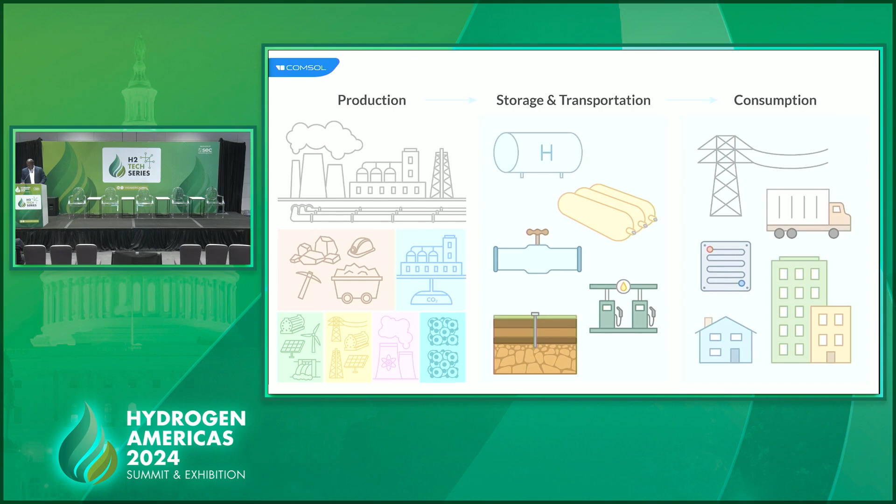The software we provide, COMSOL, allows you to model different kinds of physics at the same time, so you can have any amount of coupling you want using the same workflow and the same user interface. And this makes it extremely easy for you to test and analyze various designs in order to optimize performance and cost. So for the rest of the presentation, I'm going to go through some example models where COMSOL can be used throughout the value chain.

And I'm starting with the production side of things. SMR is still a very popular method here. There are still some unresolved issues like catalyst poisoning, and carbon deposition is a big deal here. And with COMSOL, you can model the effects of kinetics, pressure, concentration, and temperature distribution on the catalyst deactivation and reactor performance.

Solar-based methods are also gaining in popularity, and it's not hard to wonder why when you step outside. But I kid there. With solar-based methods, you have solar-based water splitting, and you also have thermal solar biomass gasification that you can model here. What you want to predict here is how efficiently the solar collector receiver system will produce hydrogen.

And what you want to do with COMSOL, or what you can do with COMSOL, is actually model the ray optics. You want to model how uniform those beams are, because they affect the heat flux that is produced. So the uniformity of the heat flux affects how efficiently hydrogen is produced with these solar-based methods.

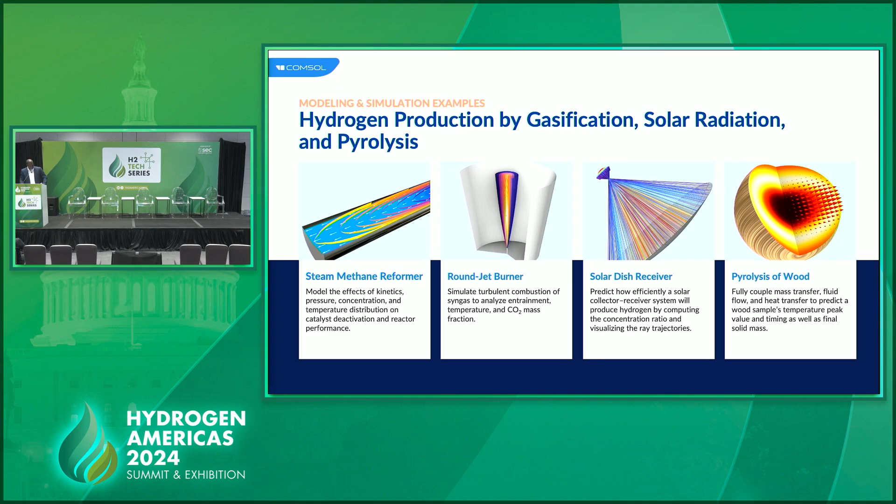So I'm going to try and focus now on some of the green methods because that's where we want to be. Hydrogen production by electrolysis is gaining popularity because it's one of the green methods. And with COMSOL, you can model all the electrolyzer chemistries, right? So whether it's alkaline, whether it's PEM, solid oxide electrolyzers, and many more, you can do that in COMSOL.

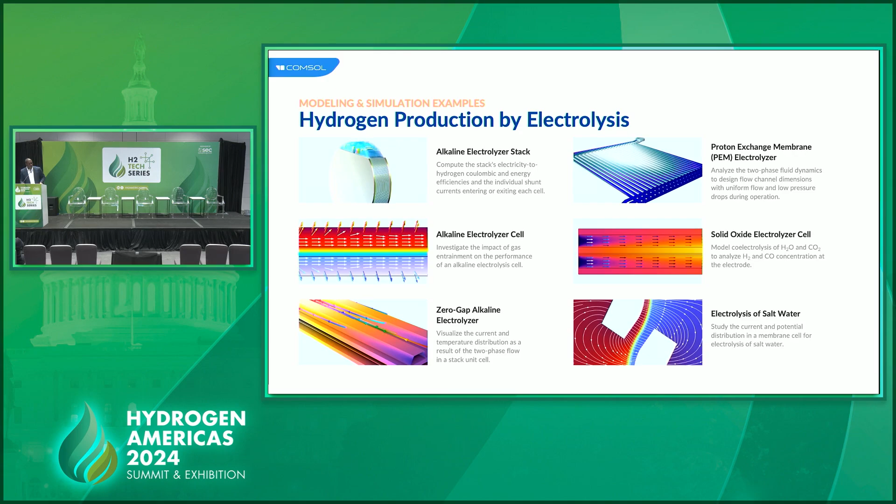And our customers typically investigate catalyst designs, the shape of the electrodes, and try to optimize some other small details. So those are things you can do in COMSOL, and you can do that at different scales. So you can do that at the unit cell scale, where you can include the full electrochemistry there. You can also include multi-phase flow. You can also do that at the bipolar plate scale.

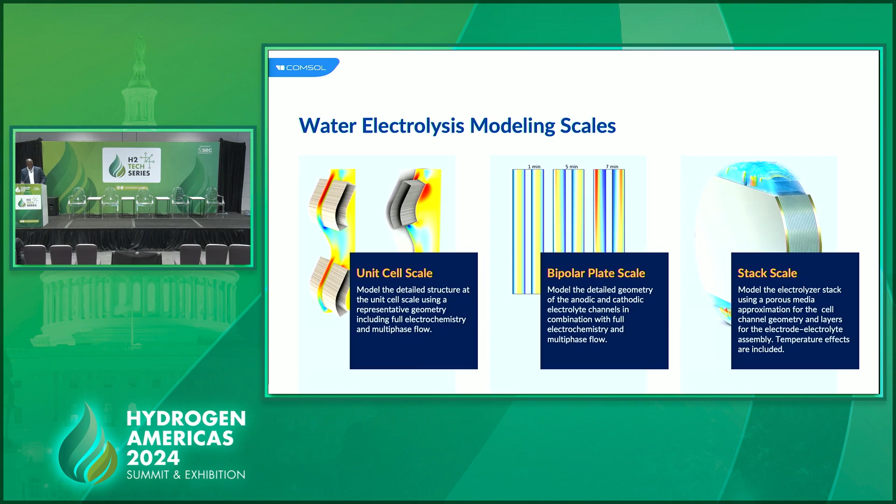In addition to the full electrochemistry and multi-phase flow, you can model the detailed geometry of the anodic and cathodic electrolyte channels. And at the stack scale, you can perform a system analysis there. You can include temperature, and you can also study the shunt current protection systems. That's some of the things you can do on the electrolysis side.

If we switch gears a little bit into storage and transportation, there are a couple of ways you can use COMSOL in this area. If we look at storage, the metal hydride-based storage methods are some of the main approaches here. You can model them in COMSOL. A couple of issues still remain in these methods. The weight and heat management considerations make it a little bit more difficult for its widespread use, but you can analyze those in COMSOL. You can study the charge-discharge process in order to identify a couple of parameters you can modify.

Another method that is gaining in popularity and is frequently used is underground storage, and I must say I'm a little bit biased with this method because I'm actually a petroleum engineer by training. And there are a couple of options to consider in underground storage. You can store it in salt caverns. You can store it in depleted oil and gas reservoirs. You can store it in different porous media rock formations.

And some of the factors you want to model are the geomechanics, the geochemistry. You want to look at the hydrodynamics. And ultimately, what you're looking for is the environmental impact assessment there. You're also looking at performance. So you can model all that in COMSOL and see whether you have a suitable storage site there.

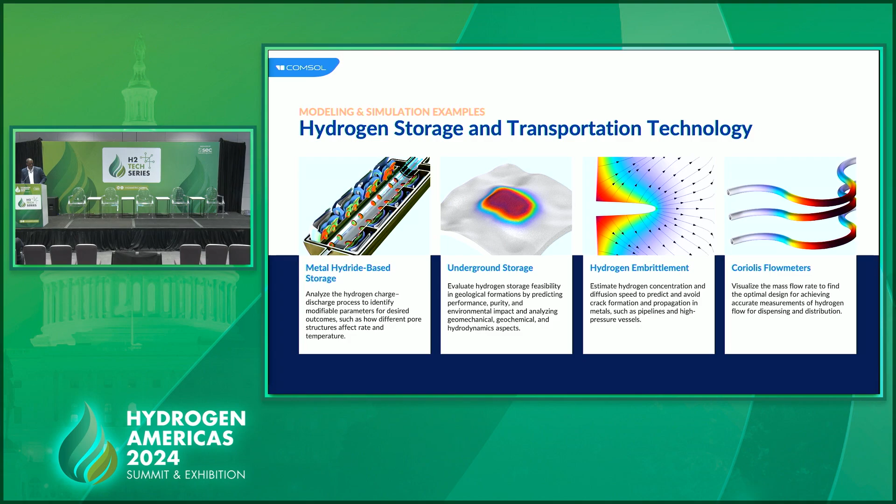Now, metering also is something you can look at. It's everything. So you want to make sure that your flow meters are accurate, and you want to make sure that they are optimally designed.

Now, when we look at production by fuel cells, you can model that in COMSOL. We have a large variety of models corresponding to the different types of fuel cells. One thing about fuel cells is that they have higher efficiency than traditional combustion engines. I know we're at about 40 to 60%, and theoretically we can get to 94%. So there's still a lot of research opportunity here for improvements. So popular design questions you want to ask here are about... you can model the full electrochemistry here.

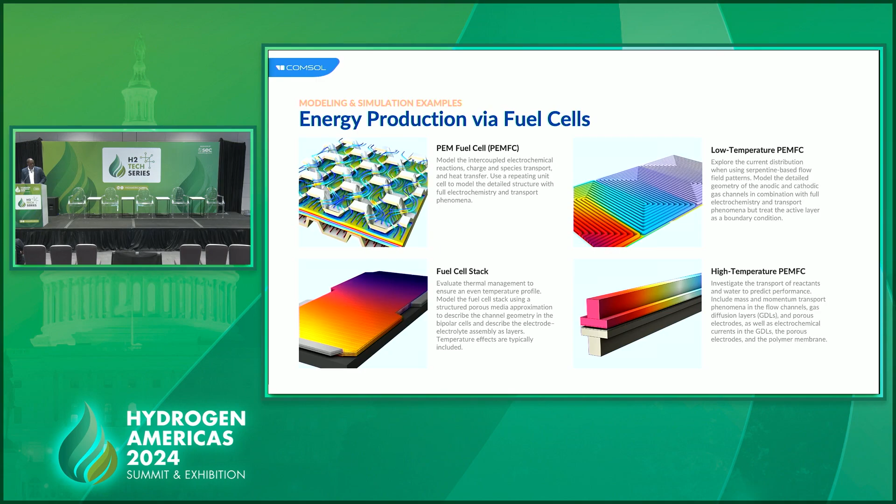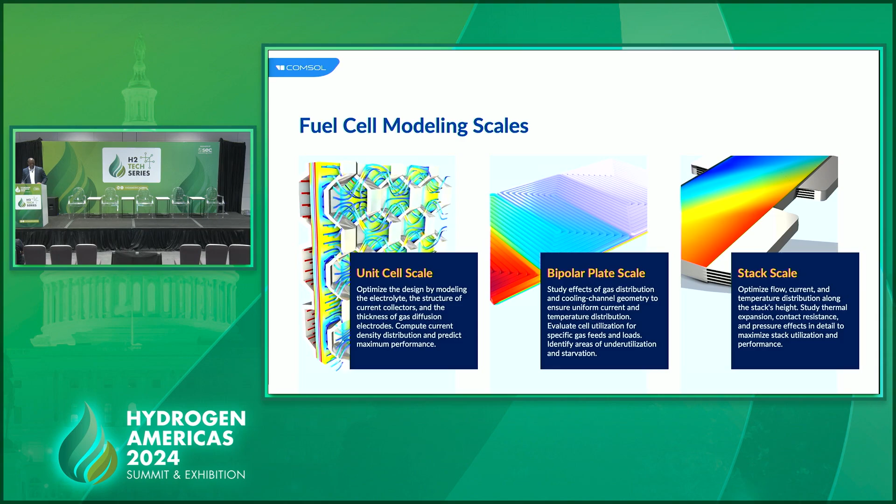You can model the heat transfer here, and you can also model the transport phenomena here. And of course, you can do that at all scales. And at all scales, you can model the current density distribution. You can predict the performance at the unit cell scale. At the bipolar plate scale, you can identify areas of starvation and underutilization. And at the stack scale, you can look at the utilization and the performance on the stack scale.

So, moving on, a user story I can share with you today is from Toyota. So the Toyota Research Center used COMSOL recently to optimize their fuel cell flow field plates. Quite a mouthful there. So they accelerated the development of their fuel cells with COMSOL. Recently, the goal, as I said, was to optimize these plates. And there are a lot of ways to do this, okay? And so what you need is kind of a tool that you can test different configurations.

And so they tested a couple of configurations they had, and this allowed them to greatly reduce the amount of physical prototypes that they were going to build. And ultimately, the prototypes that they built, they were able to confirm that these models they chose actually increased the power output and outperformed baseline conventional designs. And ultimately, this was due to better fluid distribution and uniform reaction rates because they were able to model this in simulation before they moved forward.

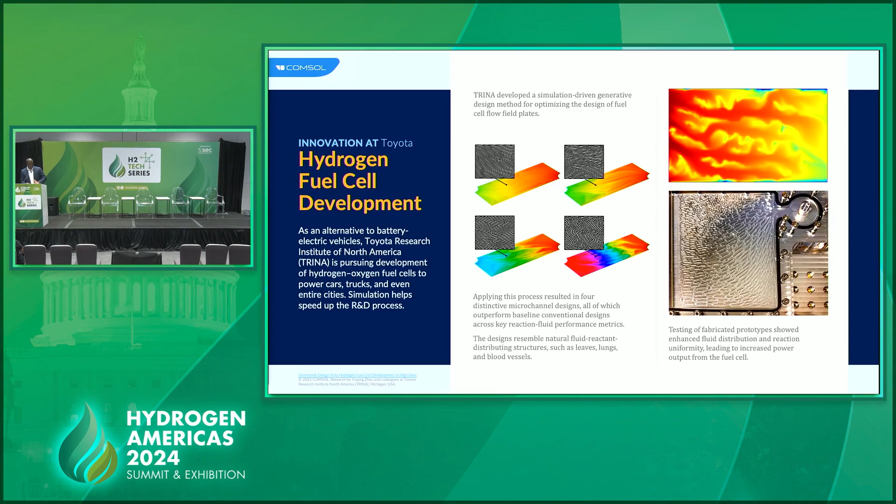But as I conclude, I like countdowns, right? So I want to share the top 3 reasons why COMSOL is well suited for hydrogen technology development. And the first reason is really that multiphysics capability of COMSOL. You can include whatever physics phenomena you want in the same model, right? It gives you the freedom to do all that. Number 2 reason will be our consistent workflow. So whatever physics field you're working in, whether it's electrochemistry, structural mechanics, electromagnetics, it's the same workflow. So you learn the general workflow, and then you can apply it for any physics. So it makes it easy for you to learn COMSOL.

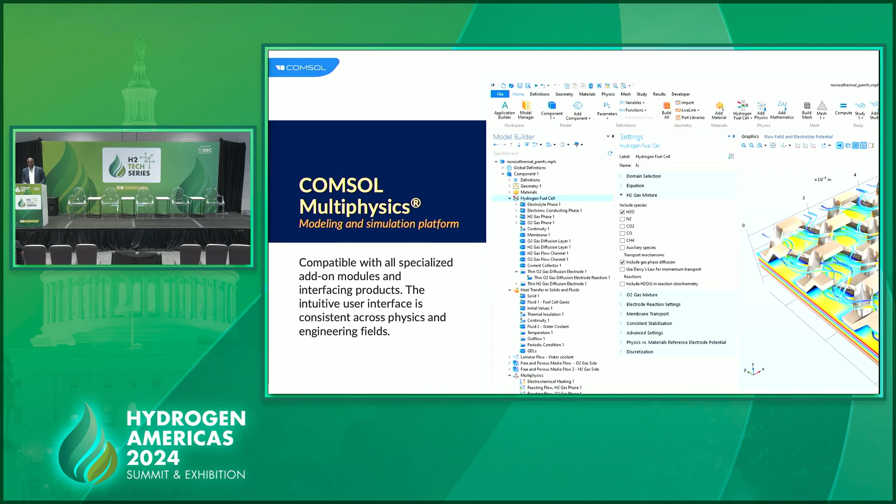And the next reason, number 3, will be the consistent user interface, right? So whatever you're working in, it's the same user interface. For example, you were seeing a ray optics model, now you're seeing an electrolyzer model. You can see it really looks the same. If I show that embrittlement model, same user interface, same workflow, and I show a fuel cell model, same interface, same workflow. And this really helps collaboration, because if teams are working on different aspects of the same device, they can ultimately come together at some point, share models, work with each other's models, and make that kind of collaboration easy.

So I'll conclude the way I started. I started by saying that multiphysics simulation can be utilized throughout the hydrogen technology value chain. And over the course of the presentation, I've tried to show that COMSOL has been used, can be used, and is still being used at this time for different aspects of the value chain. And this is because a variety of phenomena can be analyzed and modeled in COMSOL.